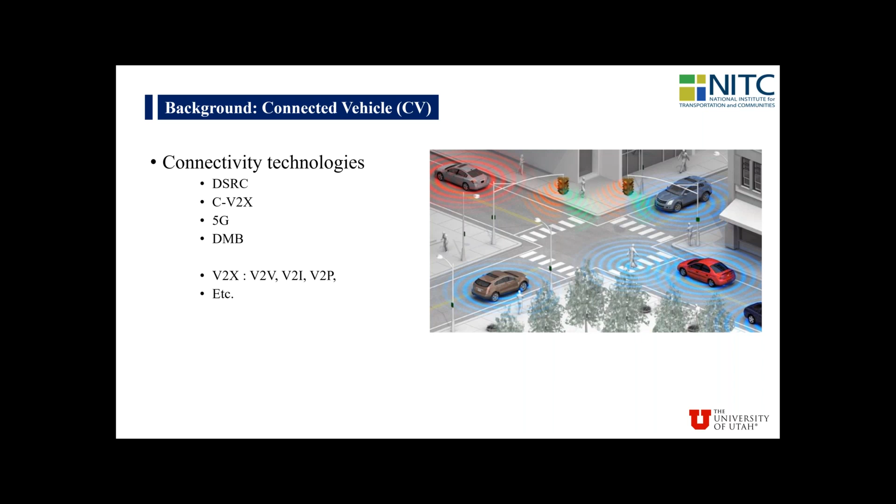So the connected vehicle is definitely not a new concept, but it's been a very popular concept since maybe 7 to 8 years ago. And nowadays, a lot of CV applications and CV-related infrastructure have been installed across the US. And on the other track, the automated vehicle, AV, or autonomous vehicle, also received a lot of attention in these years. And the SAE defined the 6 levels of vehicle automation here.

So usually starting from level 3, the AV requires the assistance of an automated driving system (ADS) to control the vehicle trajectories. And most of the time, we call level 2 to level 3 the automated vehicle, and we call level 4 and level 5 the autonomous vehicles. So there's definitely a different definition of automated vehicle and autonomous vehicle in terms of different levels of vehicle automation.

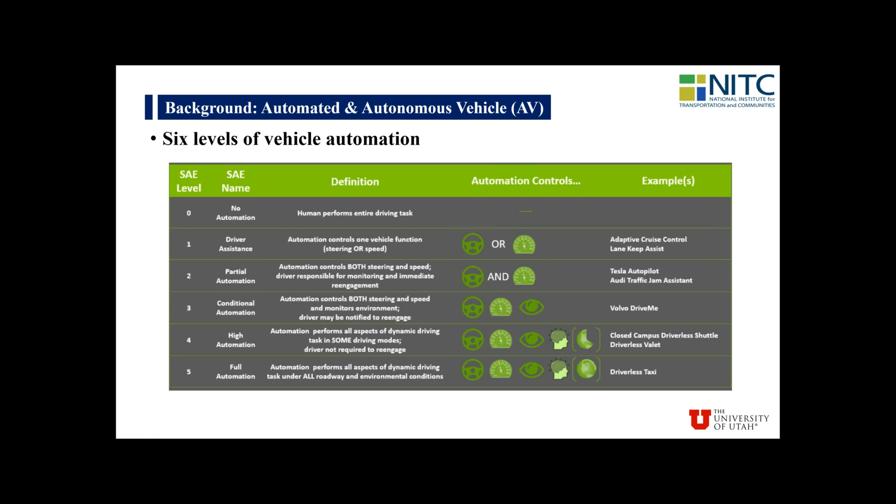But even with a lot of implementation of either CV or AV in practice, and we have seen a lot of benefit in safety improvement or mobility improvement, nowadays people have seen the limitations of either CV or AV on the street. So for example, for the CV, we can definitely gather information from the connected vehicles in real time, and we can also send the information back to the CV. But since there's no vehicle automation on board, CV still relies on the human drivers.

So in that case, you can definitely send some notification or message to the driver, but there are some people who really criticize this function because they feel like if you are sending messages to the driver, it may distract the driver and cause some traffic accidents. But on the other hand, if we don't send messages back to the CV, the CV literally becomes a real-time probe vehicle on the road, and then we lose a lot of benefits from the CV technology.

And for the AV, it basically uses the onboard sensors to detect objects and to understand the driving environment, and then to activate the ADS. But in that case, you can imagine the AV is still using reactive control, because you have to detect something, then give the response. You cannot do proactive or planning control. So with those limitations, nowadays more and more people start to look at the combination of the CV and AV technology, and that becomes what they call connected automated vehicle, CAV.

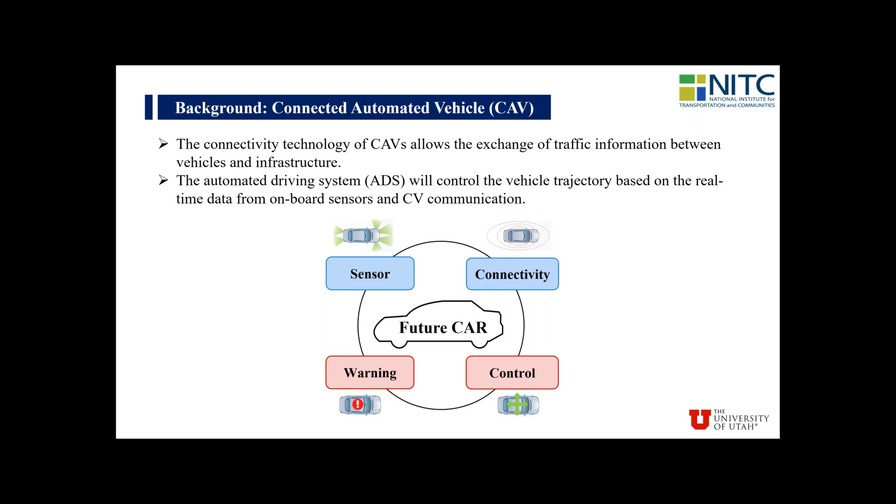Okay, so in terms of the CV system architecture, this is what we propose here. For the control level, we have 3 different levels of control: corridor level, intersection level and vehicle level. Even though we may see some research that has been done on the network level, in practice, I would say the corridor level would be the most efficient one.

And so with different control levels, here we have different modules in a CV-based traffic signal control system. Module 1 is the communication and data collection functions. So we're using different technologies to collect the real-time information from the connected automated vehicles. And then we can have the corridor level intersection coordination. And then module 3, smart traffic signal control at the intersection level. And then we can also promote some multi-modal traffic signal control systems. For example, we can promote transit signal priority control at the intersections.

And the Utah Department of Transportation actually implemented the TSP, the transit signal priority control, in Salt Lake City, and the system has been fully functioning since 2017. And in this webinar, we're gonna focus on module 1 to module 3, because we don't have enough time to go over the knowledge related to module 4.

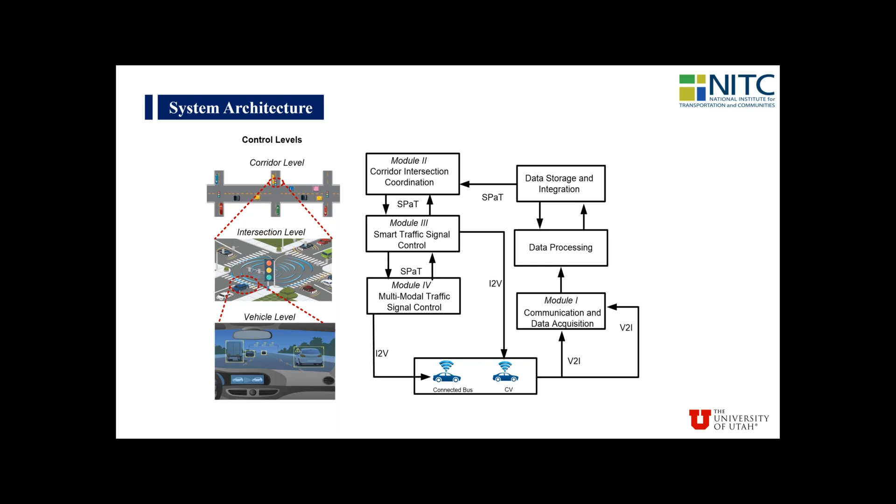So for the data collection, at present, there are 2 very different technologies that can be used to support V2X communications. The first one is DSRC. DSRC stands for Dedicated Short-Range Communications. It is often used for direct communication in a local environment, and it has been widely implemented in the US since 2017. And based on my knowledge, I think many states across the country have implemented DSRC-based infrastructure, the roadside unit, to support the operation of connected vehicles.

And I also remember back 2 or 3 years ago, US DOT was considering setting up DSRC as a standard for supporting CV communications, but that plan was canceled later on because of the new technology, the more recent one, which is called C-V2X. C-V2X utilizes cellular technology to provide a link between the vehicle and the rest of the world, including other vehicles and other traffic signal control infrastructures.

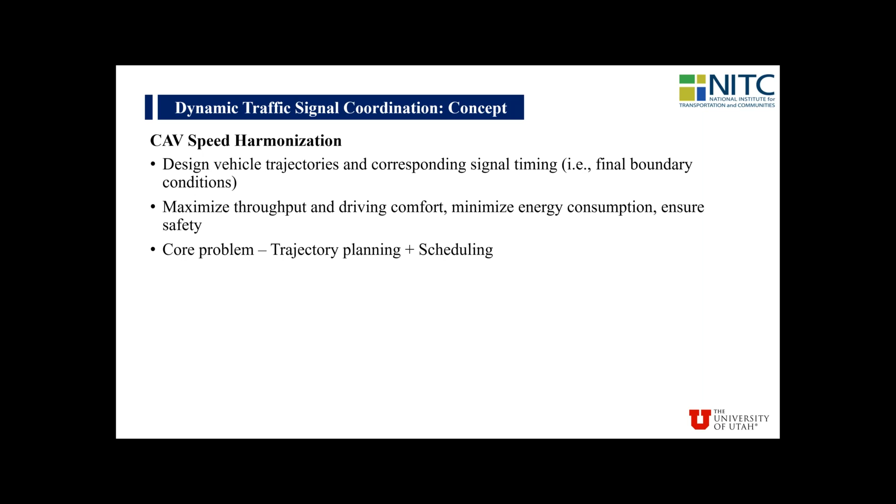But there's some argument on this issue. This would be the ideal condition, even though we can slow down the traffic. But imagine in practice, if you are the driver following a CAV on the street, and suddenly that vehicle slows down even though there's no traffic in front of it, you may be pissed off and decide to change lanes to pass that CAV. So in practice, without control of the traffic signal, if you only place control on the vehicle trajectory, you may even cause more lane changing behaviors and at the same time increase the crash risk on the street.

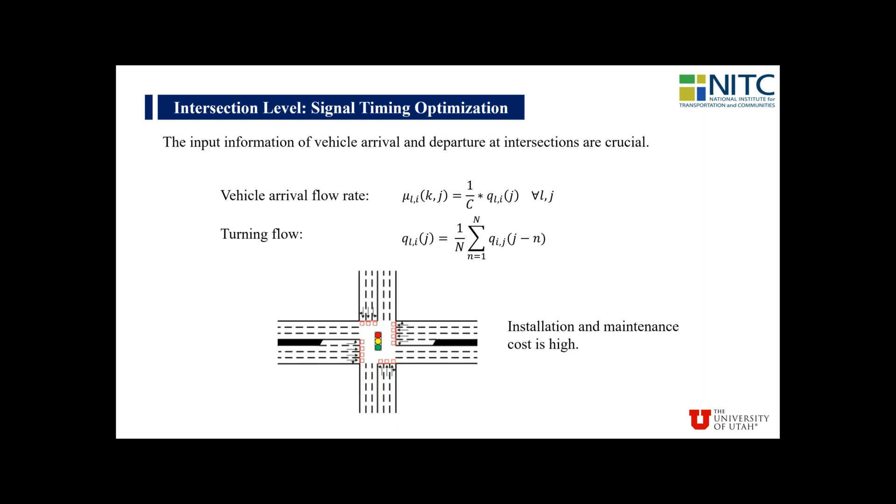But considering the installation and maintenance costs could be relatively high to support those kinds of functions, in this study we're trying to look at the possibility of only using connected vehicle trajectories as the input to control the traffic signals.

So here, in order to get the vehicle arrival pattern along with the queue length at each intersection, we want to look at a very important parameter called the market penetration rate, MPR, which is defined as the ratio of the number of CAVs to the number of vehicles traveling through the network over a certain time period. When the market penetration rate is relatively low, let's say 5% or 7%, we aim to calculate the MPR parameter based on all the vehicles on the network.

But if we have a relatively high MPR, we can calculate the MPR for different approaches of intersections. So that would depend on the level of the MPR in practice. And if we know the queue length in feet, we can also calculate the number of vehicles in the queue by dividing the queue length by the headway between vehicles. So that is the logic that will be adopted in this study.

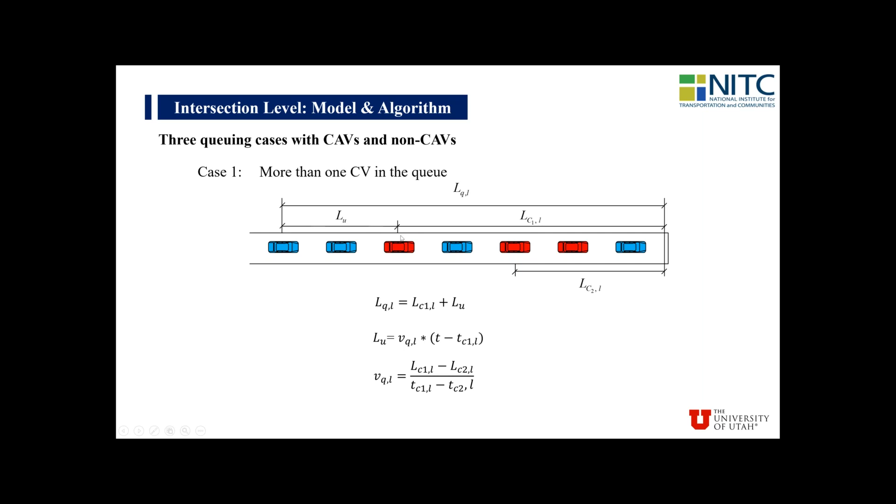The second case is we only have one CAV in the queue, so we only consider 2 different distances here. One is from the CAV to the stop line. The other one is from the last HV to the last CAV. So if we can estimate these 2 lengths, then we can get the corresponding queue length here, right?

And the last case is we have no CAV or CV in the queue, so we don't have any information for the estimation. In that case, we go ahead and adopt the information from the previous signal cycles for implementation. So those are the 3 different cases we consider in this study. With that information, we can estimate the vehicle arrivals and the queue length at each intersection from each approach.

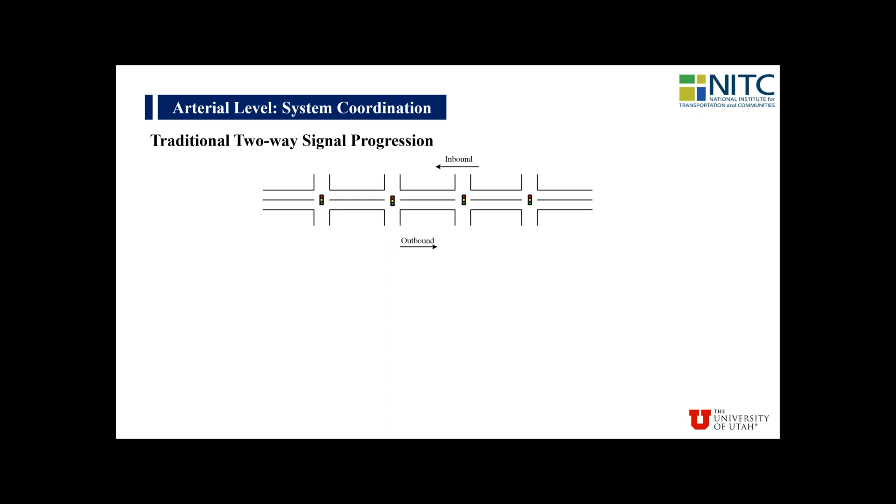And so after the introduction of the intersection level control, let's take a look at the arterial level control. So at the arterial level, we will be more interested in the signal coordinations. And first, let's take a look at the concept of the traditional two-way signal progression. So imagine we have 4 intersections here. We have inbound direction and outbound direction.

If we can properly design the signal progression plan, then we can provide a green band along these 2 directions. Then within the green band, vehicles can pass the intersection without any interruption of the red signals. So this is a traditional two-way signal progression, and I believe most of you are quite familiar with this concept.

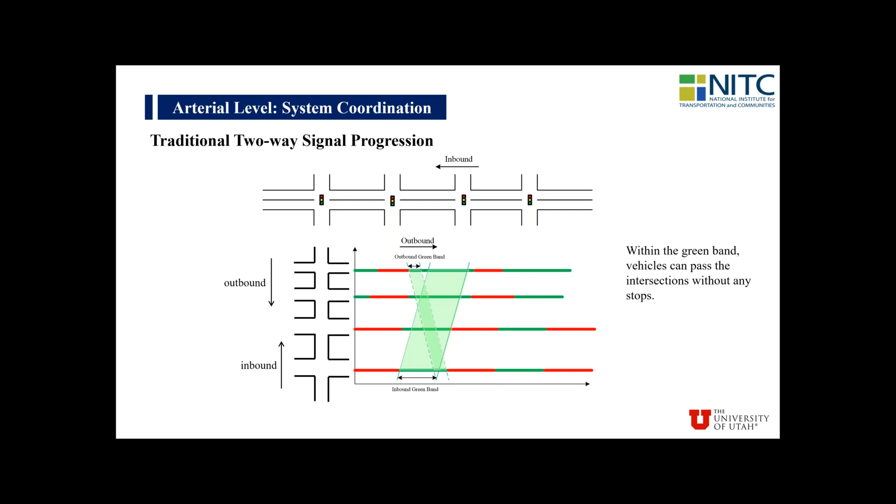But imagine in practice, the major traffic flow may not travel along these 2 through paths. And then we come up with another new concept called the multipath progression. So here let's briefly explain what a multipath progression is. Again, let's imagine we have 4 intersections, and if we have one major path, that means we have a lot of traffic traveling along this path in practice.

So then if we can properly design the signal coordination plan, we can provide a green band along this path. And then at the same time, if we have another path, instead of being a through path, we may have some turning actions along this path. So if we can properly design the signal coordination, again, we can still provide the green band along this path.

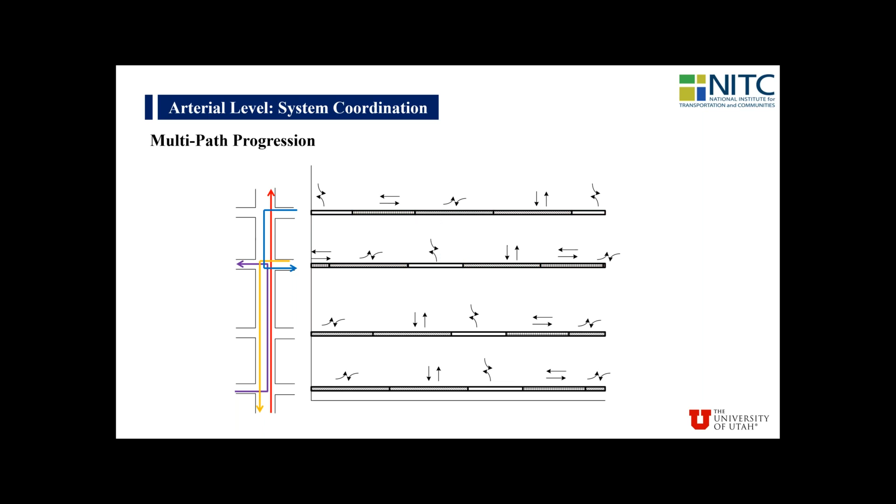So similarly, if we have another path along a different direction that still involves some turning action, we can also provide the green band. And then for the next one, we can also provide the green band. And then this is a summary of the green band along different paths here. And so this is what we call the multipath progression.

So instead of just providing the progression along the 2 through directions, we look at those popular or congested paths along the arterial, and we aim to provide the progression along different path flows. And so in this study, we are developing the signal control system based on the CV trajectories.

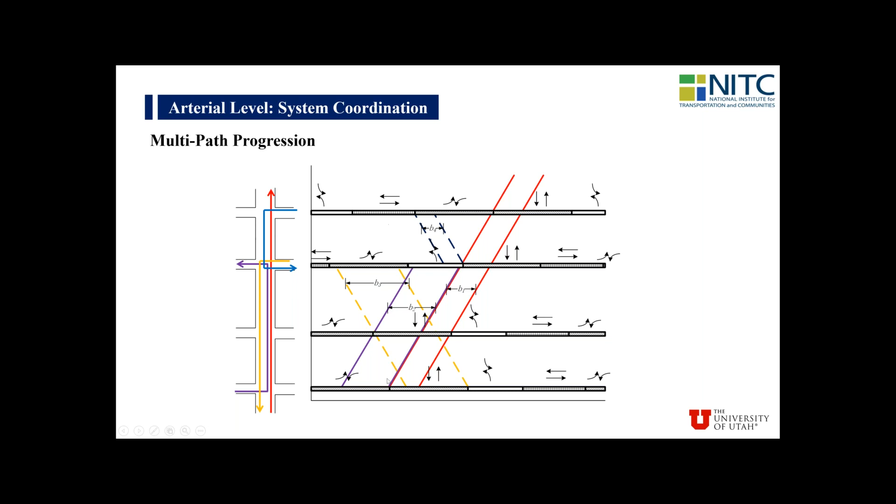So then with the CV trajectory, we can definitely accumulate the CV trajectories, then look at the most popular paths along the arterial. So then we can identify these kinds of multiple critical paths along the arterial. Then we can try to design the signal coordination plan to accommodate the traffic along those paths.

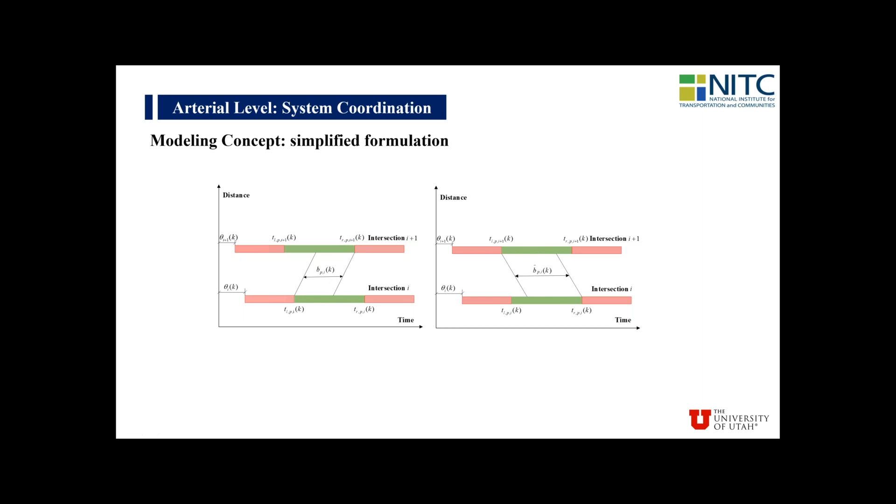So we updated the model to a real-time version, and in this case, instead of looking at the green band along the entire arterial, we are interested in looking at the band between two adjacent intersections. So then, if we can somehow maximize the green band along two adjacent intersections, then we can maximize the band along multiple intersections.

But here, there's a critical issue: if we only look at the band between the intersections, then those bands may not be connected with each other. So for example, we can see the discontinuity between these two bands. Then in this case, we cannot have a green band that can pass through the three intersections. So this will be the potential issue here.

And in this study, besides those typical constraints to control the green band between the intersections, we also come up with this set of constraints to ensure the continuity of the green band passing along multiple intersections. And again, this model can be solved by dynamic programming to ensure the application in real time. And in terms of the stage, that is the index of intersections, intersection number 1, number 2, and number 3, and so on and so forth.

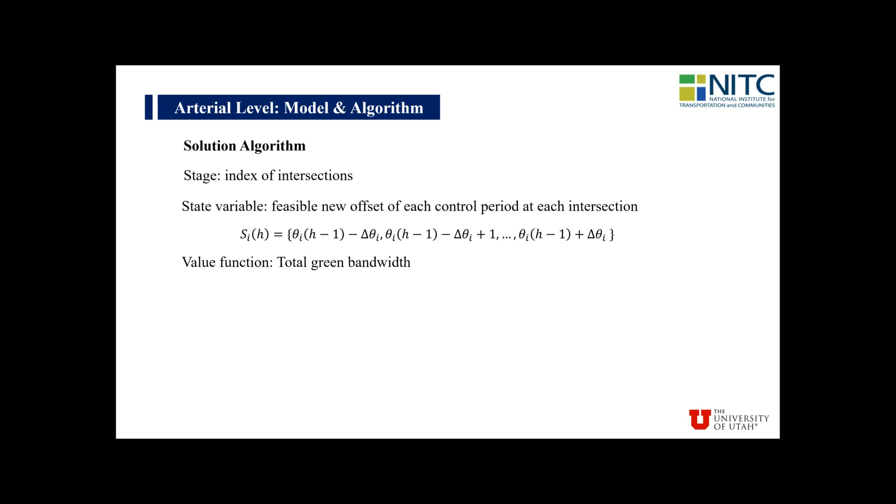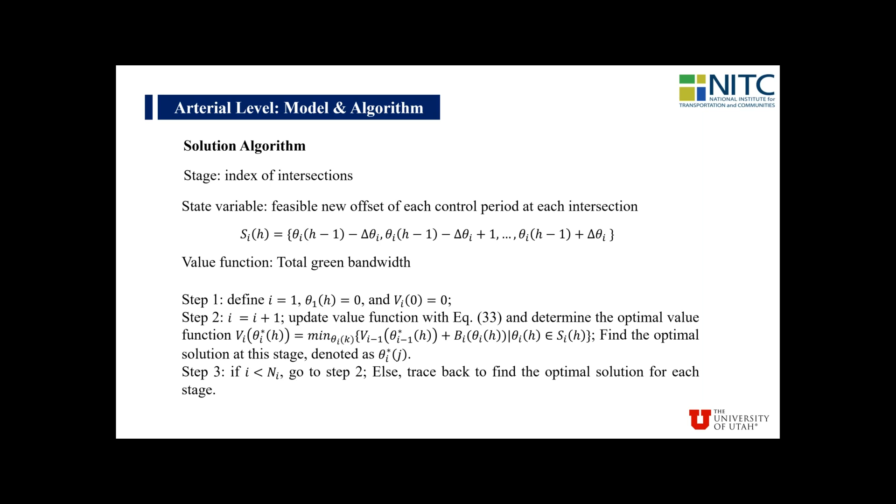And for the state variables, we use the feasible new offset of each control period at each intersection as a state variable, and the value function is the total green bandwidth along each pair of adjacent intersections. And this is a summary of the solution algorithm, but I don't want to spend too much time going over the details here. And in summary, we are also using dynamic programming to solve the model.

Okay, so now let's take a look at the numerical examples that implement both intersection level and arterial level traffic control. We're conducting the case study on 4 intersections on State Street in Salt Lake City, Utah. And this is the signal timing plan for these 4 intersections.

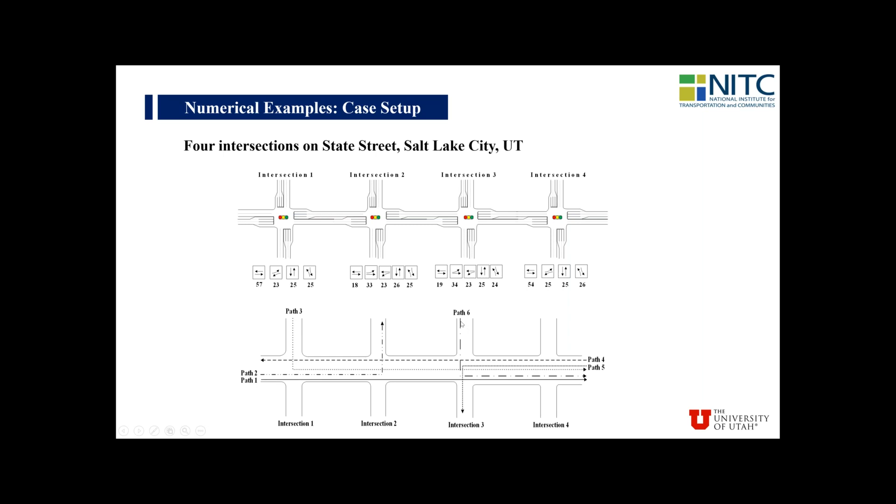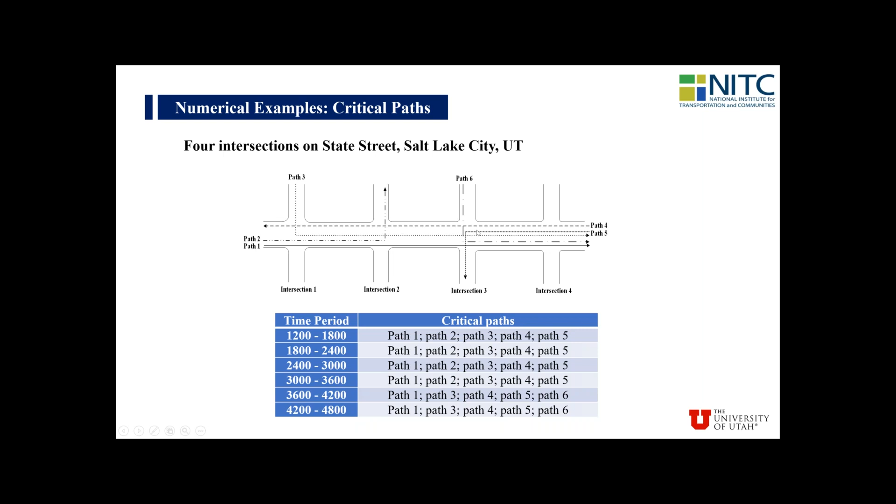And with the CV data from simulation, we have identified 6 different traffic paths along these 4 intersections, from path 1 to path 6. And this is a summary of the identified time-dependent critical paths over different time periods. So for example, for the first hour, we have the critical paths to be from 1 to 5, and for the second hour, we have paths 1, 3, 4, 5, 6 as critical paths, right? So this is the information we got from the CV trajectories from the simulations.

And based on that, we have implemented our model, and we also make the comparison with 2 different models. So here, the adaptive control system refers to the one that only uses the traffic sensors to detect the flow and only does intersection level control. And the dynamic progression control system refers to the one that has the adaptive control along with two-way signal progression.

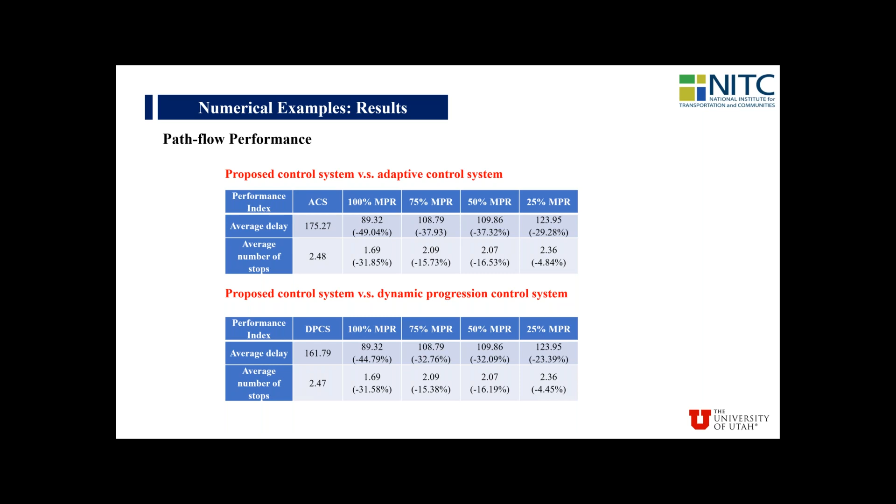And if we only look at the performance along those critical paths, then you can see the reduction of the delay and the number of stops can go up to even 50% under 100% MPR. Even though we only have 25% MPR, we can reduce the delay along those critical paths by 30% in those cases, right? So in this case, with the multipath progression, we can reduce a lot of the delay along those heavy flow paths in practice.

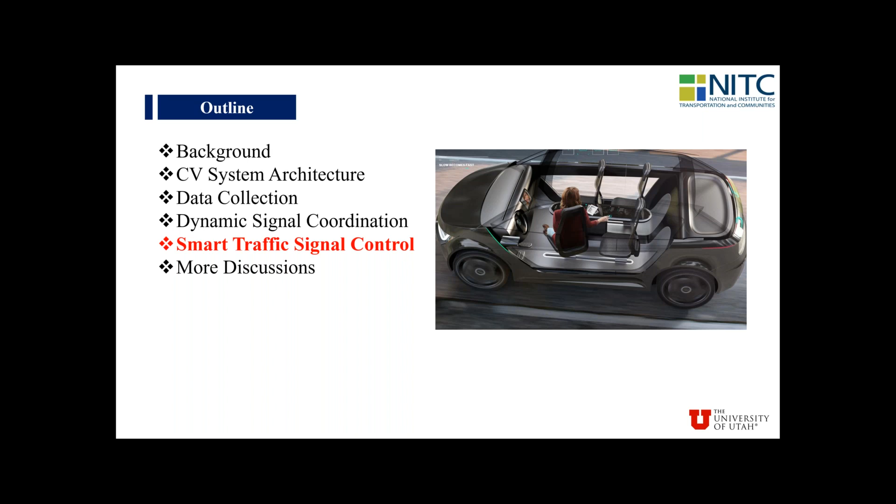Okay, so in the next part, I want to introduce another smart traffic signal control system. In terms of the background, in this system we aim to improve both mobility and safety. So that will be the extension of the model we just introduced. For that model, we only aimed to improve the mobility performance. But for this case, we also aim to improve the intersection safety.

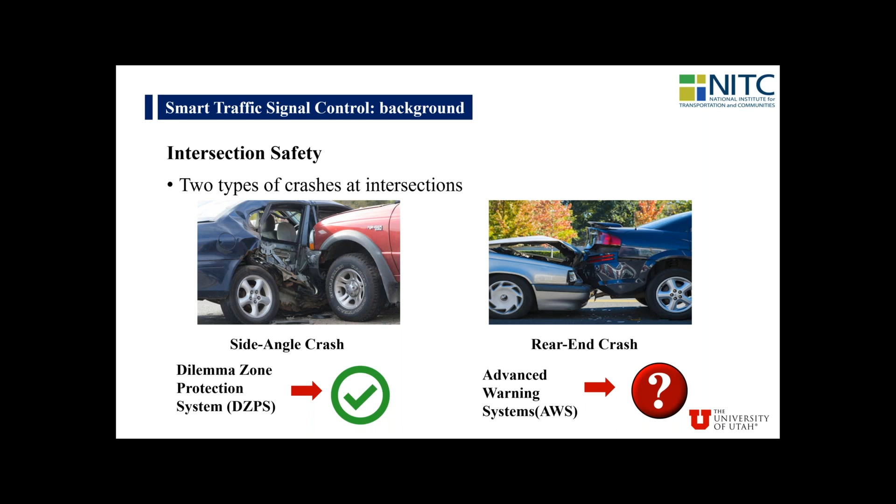So at the intersections, we may observe two types of crashes. The first one is the side angle crash, and the second is a rear end crash. The side angle crash can be prevented by using dilemma zone protection systems, DZPS. But for the rear end crash, some people argue that we may use the AWS, advanced warning system, to prevent it. But after many years of implementation, this solution is still questionable because we don't see much crash reduction, even though we're using AWS in practice. So in summary, the prevention of rear end collisions at the intersection is still an unsolved problem.

And traffic safety and mobility are usually implemented with different control devices. For example, we're using one package to improve the safety and another package to improve the mobility. So then they often compete for the limited available resources: they compete for bandwidth, they compete for space to install the sensors. So in this project, we aim to integrate the control devices for both operations and safety, so as to concurrently achieve effectiveness in these two regards, improving safety and mobility at the same time with one single unit. And this is the architecture of the proposed system.

So we have the traffic signal light here, and we have an RSU to collect the real-time CV information, and also we can use the RSU to send the information back to the CVs along with the advisory speed. At the same time, because we also have a lot of human-driven vehicles, the HVs, on the street, we're using the dilemma zone detection sensor to detect the trajectory of the HVs in real time. And also we're trying to use the VSL, variable speed limit, to control the speed of HVs, right?

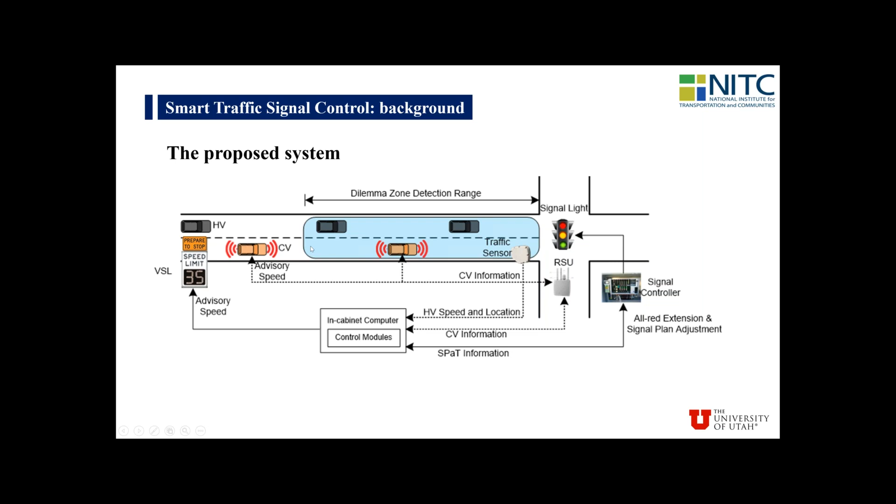And this is the system data flow. So we have different data resources here. We have the microwave sensor that can detect the arrival of the human-driven vehicles, we have the RSU to collect the CV data in real time, and we have a signal controller. So along with those sensors, we can get different types of data. We can have the HV location and speed, the CV trajectories, and the SPaT information, the signal phase and timing plan, from the signal controller.

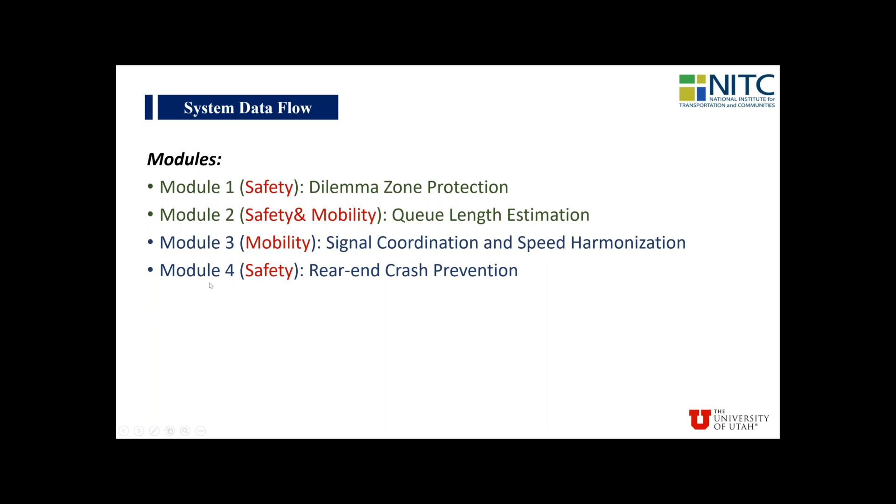And then in terms of the control modules, we have 4 modules here: dilemma zone protection, queue length estimation, real-time signal control, and rear-end crash prevention. The first module is for safety purposes, the second module is for both safety and mobility, the third module is for mobility improvement, and the last module is for safety.

For the first module, dilemma zone protection, this module aims to predict the vehicle passing probability at intersections, then decide whether or not we should provide all-red extensions to protect those vehicles that pass the intersection at the last second of the yellow time. So this is a very typical dilemma zone protection system.

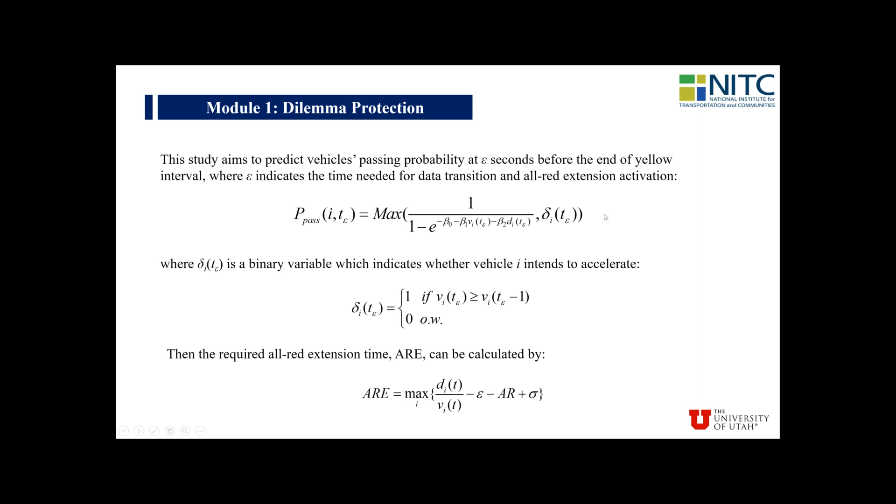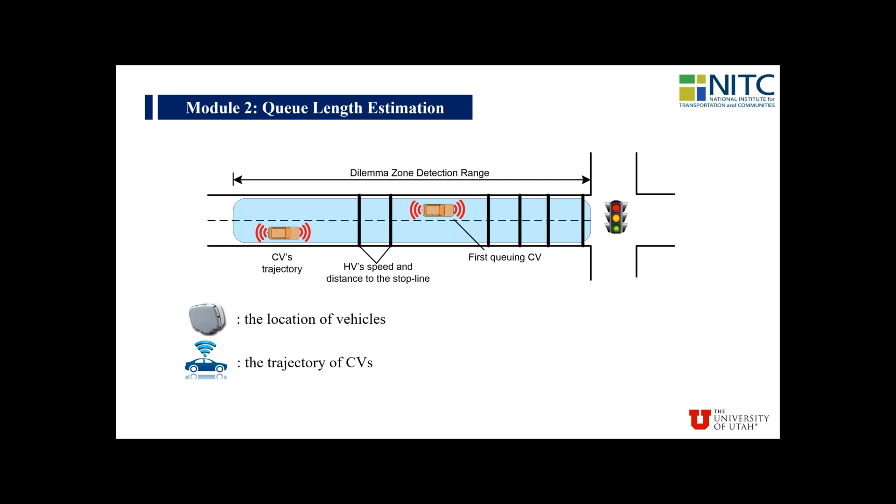But with the RSU, we can get the CV trajectories. In that case, we can get the exact lane and location of each CV in practice. So we have 2 different data sources, and we can implement the queue length estimation model we introduced in the last study to estimate the queue length in real time. And again, we have three different cases here. Case 1, we have more than 1 CV. Case 2, we have only 1 CV, and case 3, we have no CVs.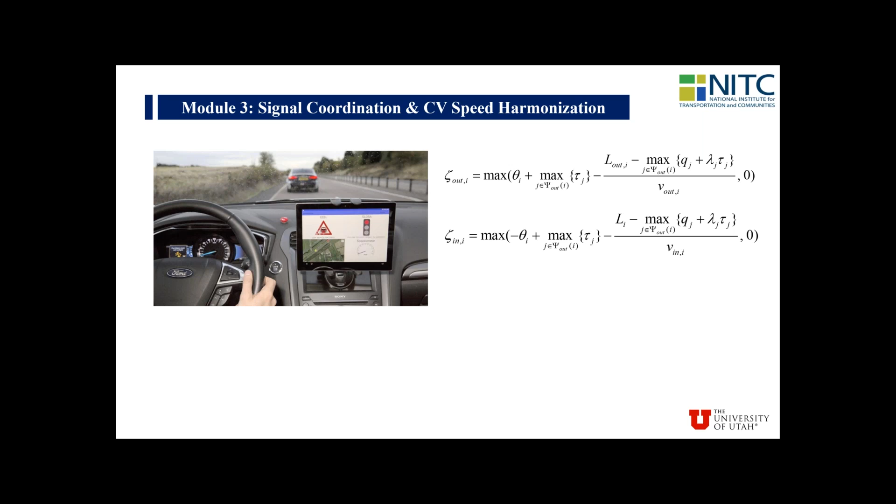Module 3 is the implementation of the signal coordination and CV speed harmonization we introduced before. And module 4 is to prevent rear-end crashes. Here we have 3 different sub-modules. Sub-module 1 is to prevent crashes when vehicles arrive with insufficient sight distance after the onset of green. Sub-module 2 is implemented after the onset of red. And sub-module 3 is implemented during the yellow and all-red times.

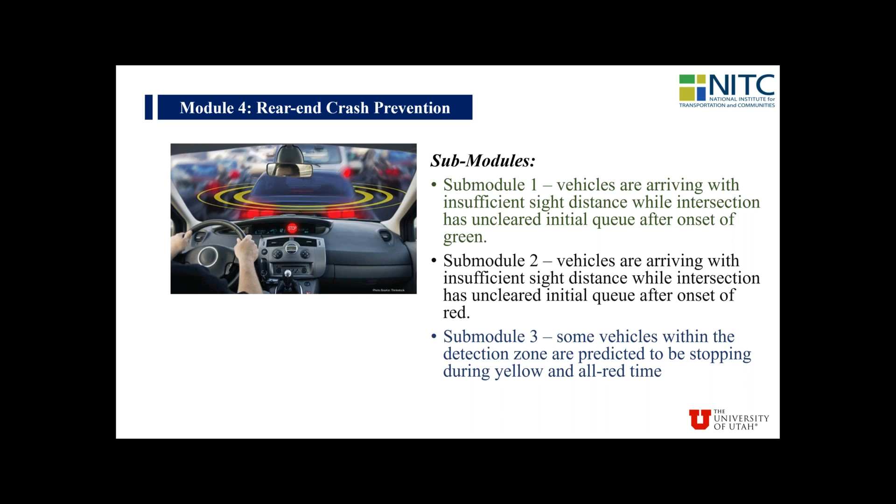We don't have enough time to go over the details of the different control modules, but we have a paper published in TR, and if you are interested in the details, please go ahead and look at this paper for more information. And here is the system control logic along with actions.

So based on the signal status, if it is during the yellow and red time, we activate the safety-related modules to either protect the dilemma zone or mitigate the rear-end crash with the all-red extension and advisory speed for a safe stop.

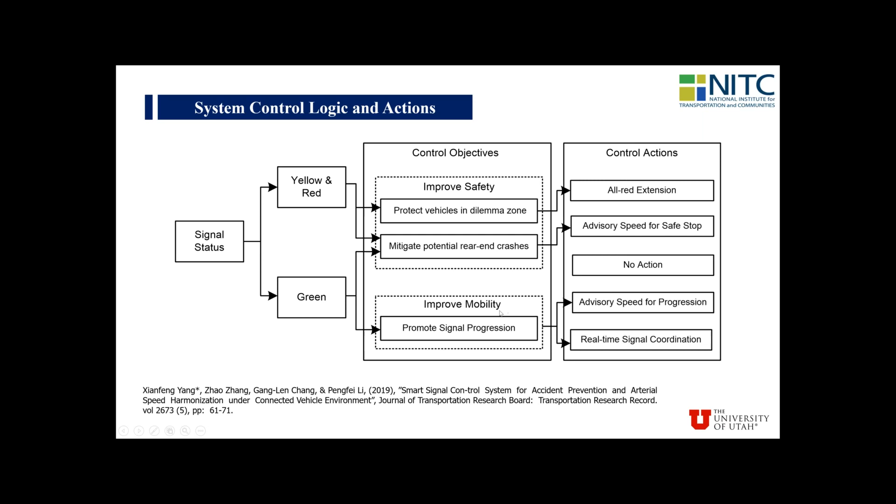And if that is during green duration, we activate the mobility function to promote the signal progression. And again, we're providing the advisory speed for progression. Also, we do the real-time signal coordination. So this would be the logic that combines both safety and mobility functions together.

And here, in terms of the numerical test, we conduct a study on 5 intersections on the CV corridor operated by UDOT. And we also evaluate the system performance with VISSIM simulation. And here, in terms of scenario settings, we have some basic settings. We assume 40% of the regular or human-driven vehicles comply with the variable speed limit. And we assume there are 10% connected vehicles or connected automated vehicles on the street.

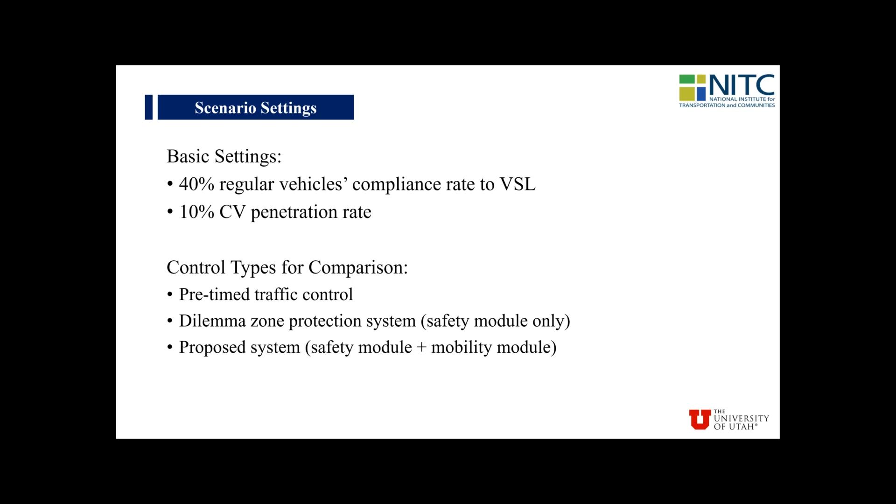And in terms of the model evaluation, we evaluate different models for comparison. We look at the pre-timed traffic control, and we look at the dilemma zone protection system, which means we only have the safety modules. Then along with the proposed system, which includes both safety and mobility modules.

And for the safety MOE, measure of effectiveness, we look at the average number of vehicles trapped in the dilemma zone, average number of potential side angle crashes, number of potential rear end crashes, and also number of red light runnings per signal cycle. And for the mobility, we look at the number of stops and vehicle delay at intersections.

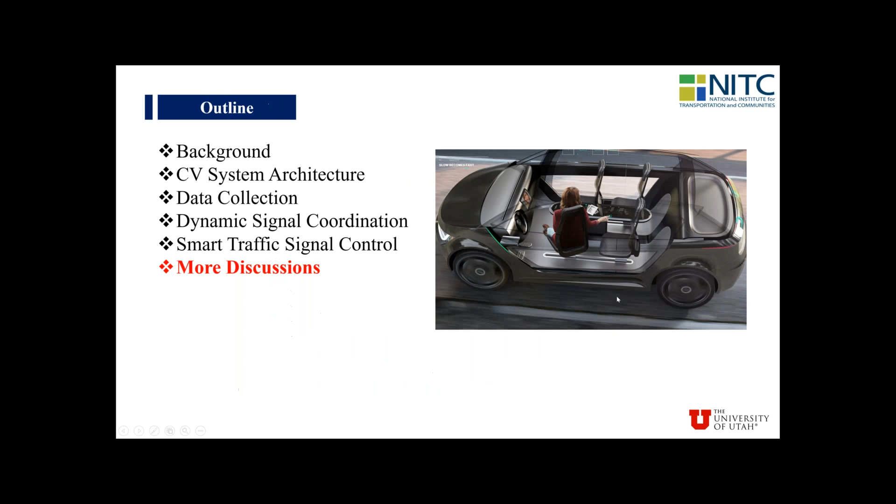Okay, so let's spend maybe 1 to 2 minutes to have some more discussion on the role of governments, considering most audience are from government agencies. So I had some discussion with the UDOT folks, and the common question is they're more interested in connected vehicle technology, but in terms of AV technology, their question is why we care about AV related projects, because the government is not the AV company. They are not actually producing the AVs.

So in terms of the roles of the government, well, the government can definitely choose to do nothing, to let AVs operate without connections. But as mentioned, the priority of AV is safety. So if we only have AVs on the street and everyone is based on reactive control, then we can even make our traffic condition worse. So if the government does not do nothing, they can also definitely promote the CVs. With the promotion of CVs, there are definitely some opportunities along with liabilities in practice.

So here the opportunity is to demonstrate the benefits of CV over the AV alone, but at the same time we also have some potential liability of providing CV data. So for example, we're providing the SPaT information to the CVs, and the CV relies on the SPaT information to operate the vehicle automation function. But imagine what if your SPaT information is not reliable? That can potentially cause a traffic crash in practice. So in that case, the liability goes to the government because you're providing inaccurate SPaT information to the CV automation functions, right?

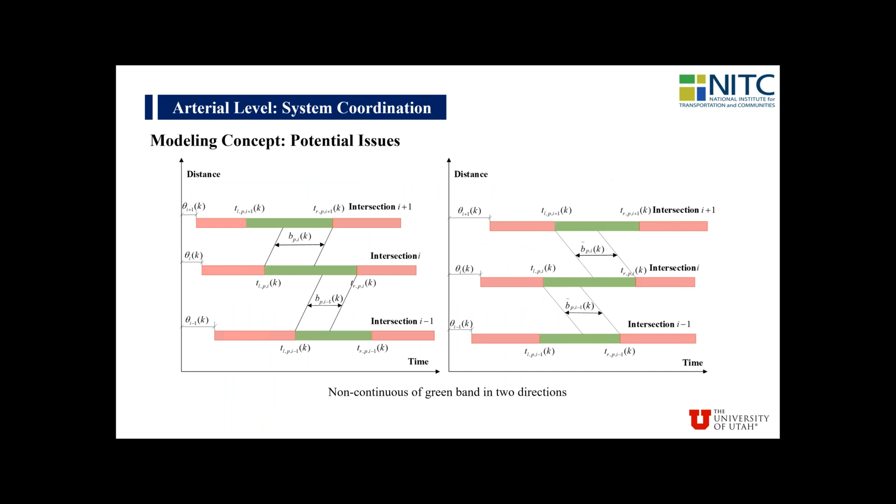And so I think the first aspect will be to provide education to human drivers to let them know why the CAV is slowing down, and that it is for the benefit of improving the traffic condition. And the second one is definitely associated with that, that is to provide more advanced vehicle-level control, because what you can do alone from the traffic control aspect is limited, especially under the low MPR condition.

So the second solution could be to provide better vehicle-level control to try to provide better accommodation of the trajectory of operation based on the current traffic signal plan.